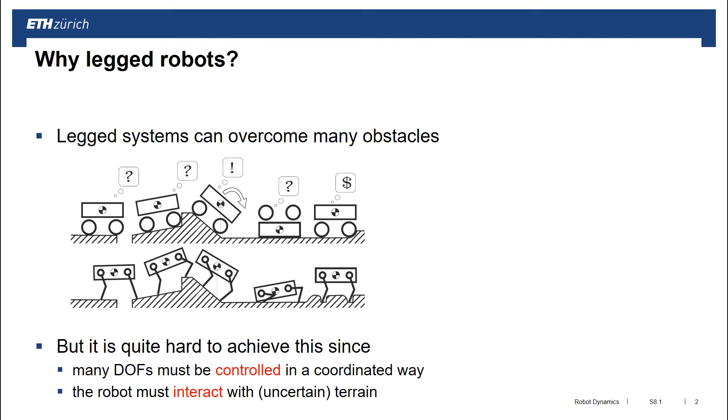The nice thing is that these mechanisms developed at the time, or the ideas behind them, were even included in some of the first machines that were really walking and had an engine to propel them forward.

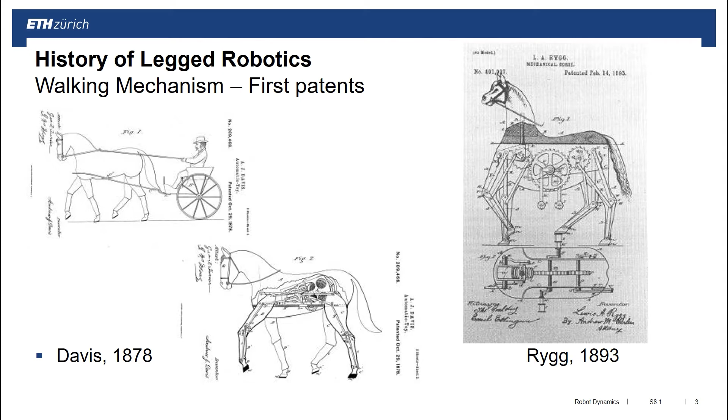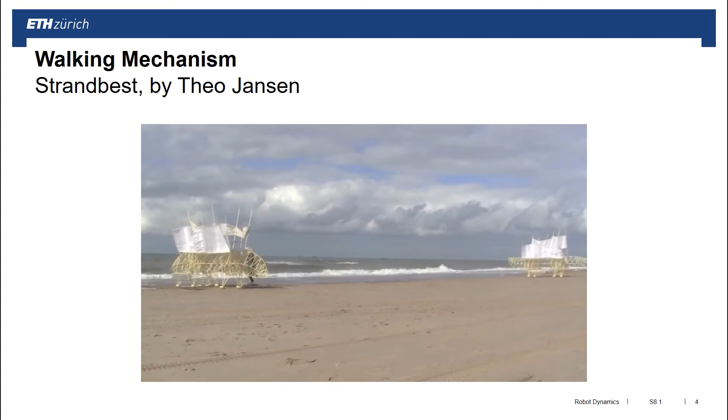These mechanisms still find application today. What you see here are the Strandbeest developed by Theo Jansen, a Dutch artist and sculptor. This is a mechanism that walks as if it had legs, propelled simply by the wind.

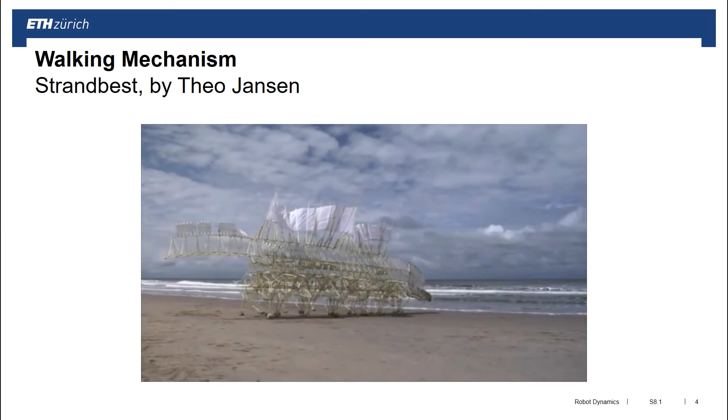These mechanisms are connected purely mechanically throughout the huge machine, and when you move them, these crank mechanisms create motions like the leg motions of a human or an animal, making the system move like that.

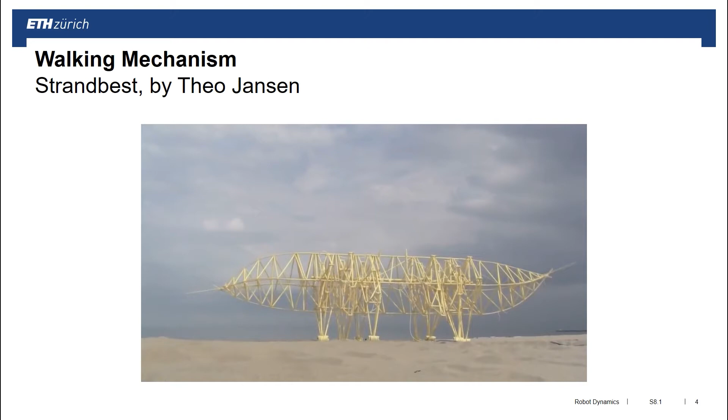This is purely passive. Really the only energy added to the system is coming from the wind. That also shows you a little bit how efficient machines can become.

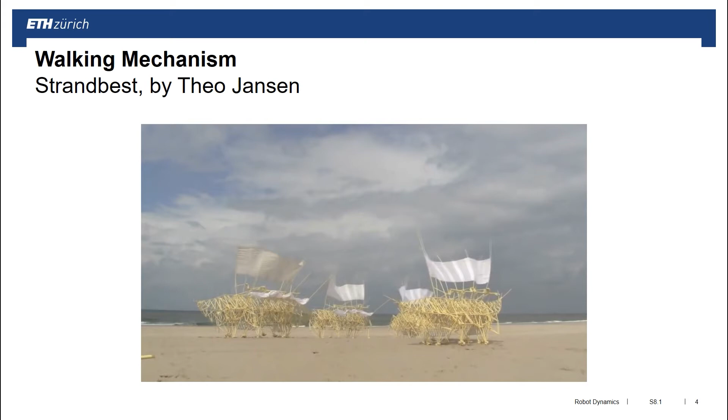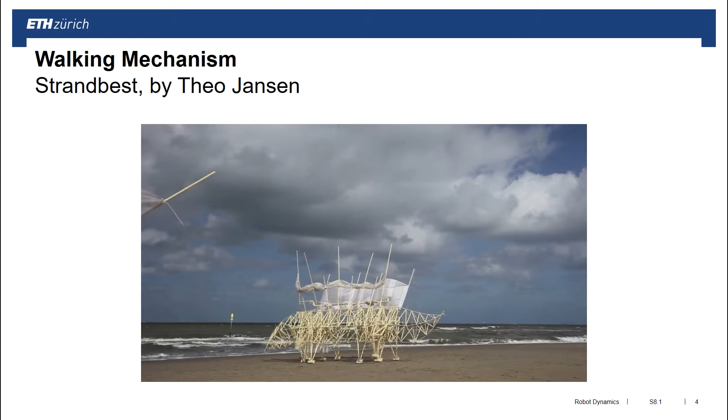Walking from A to B on flat ground is in essence zero energy work. All you have to do is compensate for the impact losses and friction losses in the mechanism. But as you can see here, this can be done pretty efficiently.

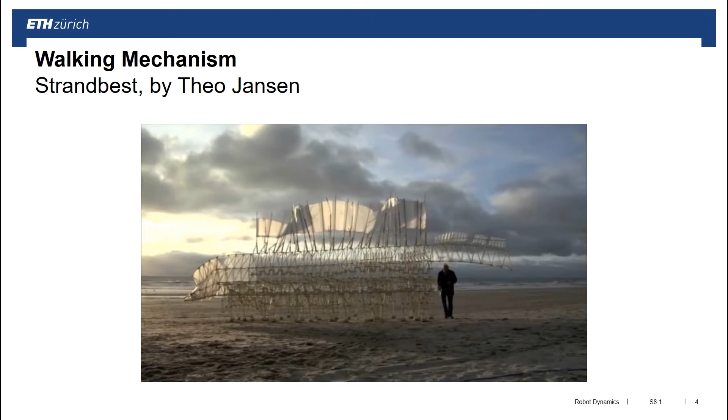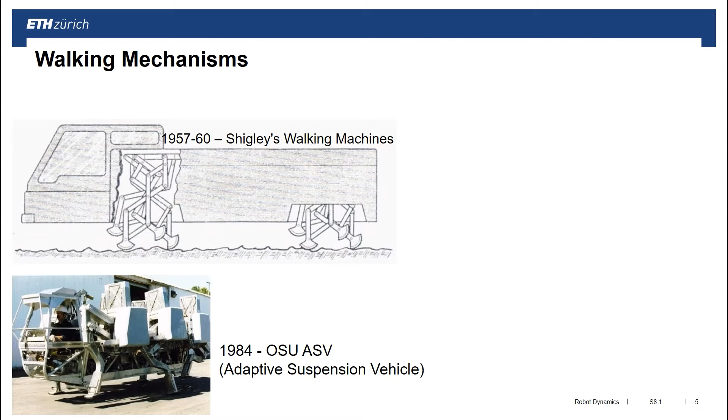These legs were, to a large extent, moving due to coupled mechanisms. At the time they didn't have computers able to calculate all these motion trajectories, but instead they mechanically realized that. Instead of me telling you more, here is a small video by the guy who developed this adaptive suspension vehicle, explaining a bit what they were doing.

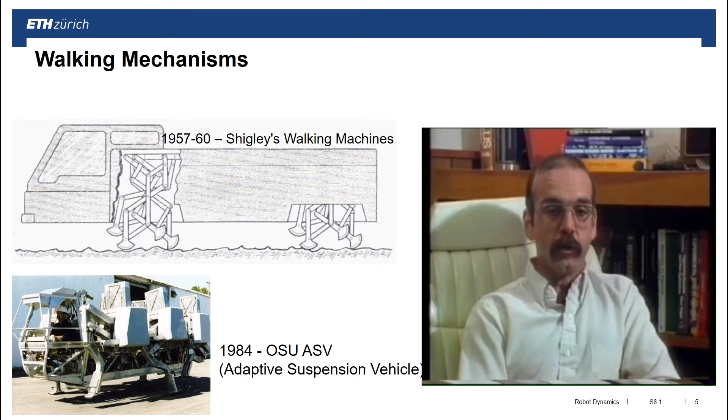The military has been interested in legged locomotion for quite some time, at least 20 years actively that I know of. The reason is that 50% of the dry land mass of the world is impassable to wheeled or tracked vehicles of any military design.

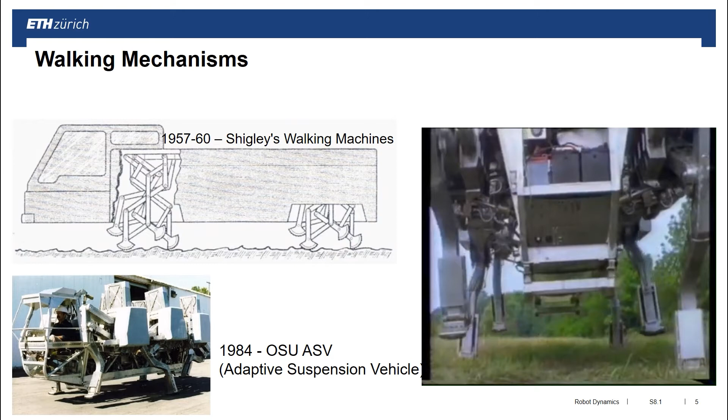Enter the Adaptive Suspension Vehicle, a six-legged juggernaut developed at Ohio State University for the United States Department of Defense. Ultimately, production versions of this prototype will carry men and equipment through dense forest, marshes, and boulder-strewn hillsides where even tanks cannot go.

As we'll see, the work going on around the world is producing a new generation of walking robots that embody many principles of biology-based engineering.

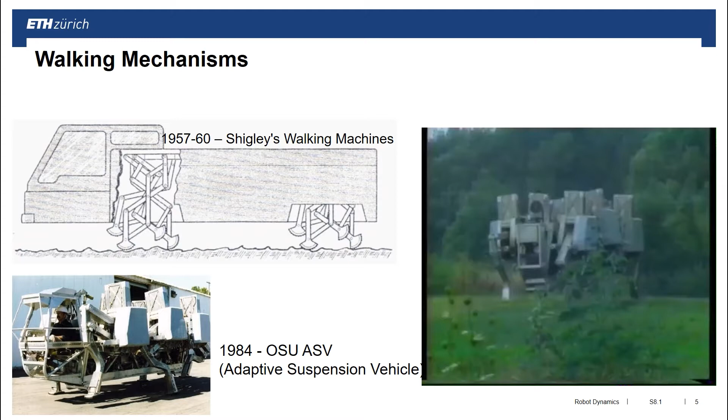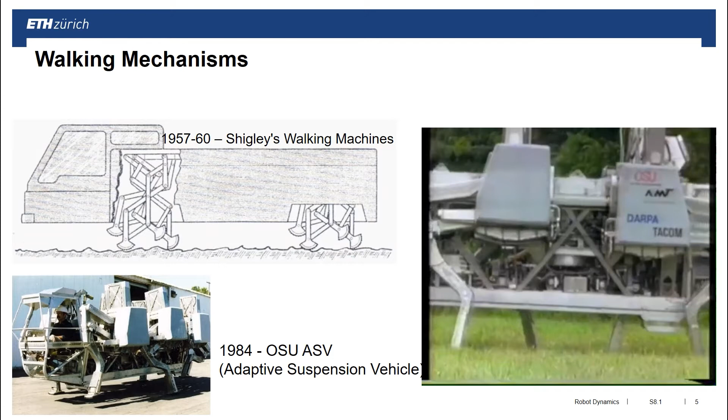A machine with 6 legs, like the adaptive suspension vehicle, can move faster. It has 2 tripods, meaning half the legs can move forward with each stride. It actually moves its legs like an insect in a pattern called the alternating tripod. At any one time, the insect is in contact with the ground through 2 legs on one side and 1 on the other, while moving the other 3 legs forward.

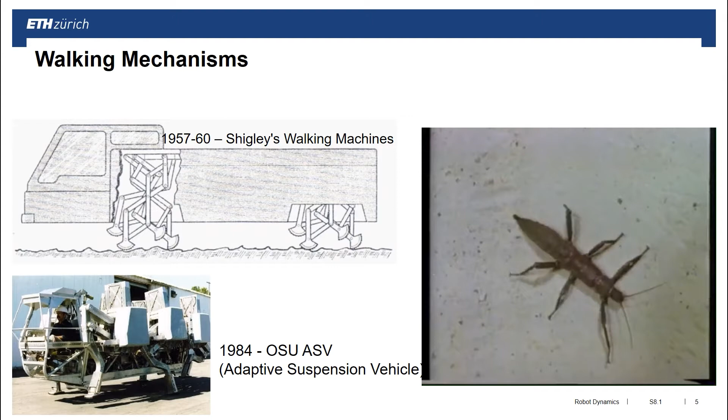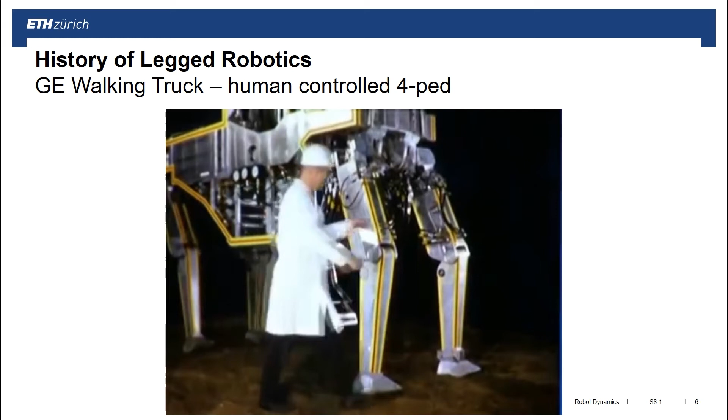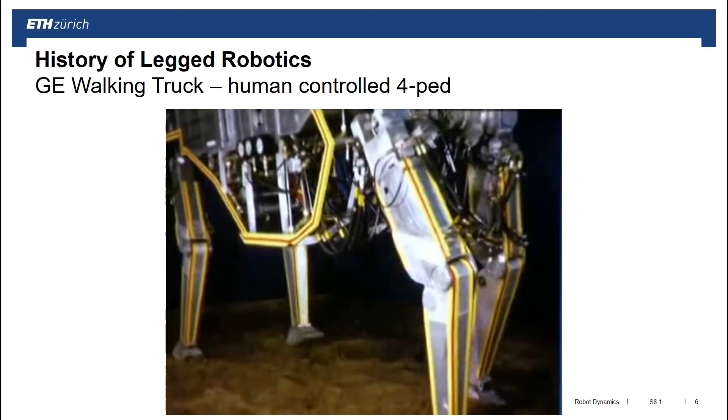A different direction are the developments by GE, which also happened around the 60s. In this example, you see the GE walking truck. This is a vehicle that has no mechanical coupling in the legs to make the leg move along a predefined swing leg trajectory. Instead, they have hydraulic pistons in multiple degrees of freedom of the leg, and then they have an operator sitting in the machine who coordinates the action of the individual joints, opening and closing every single valve of this machine in order to make the system move around.

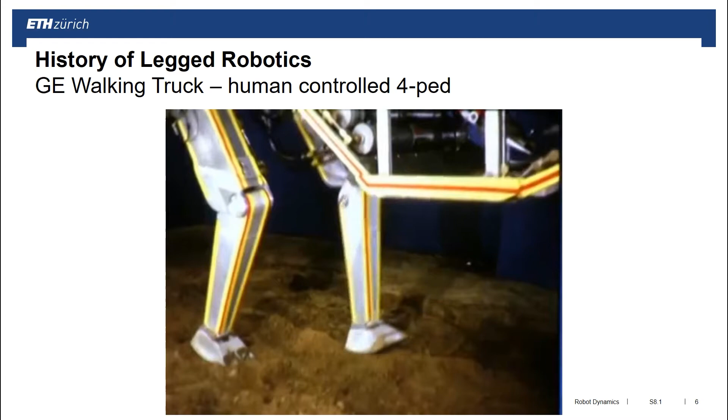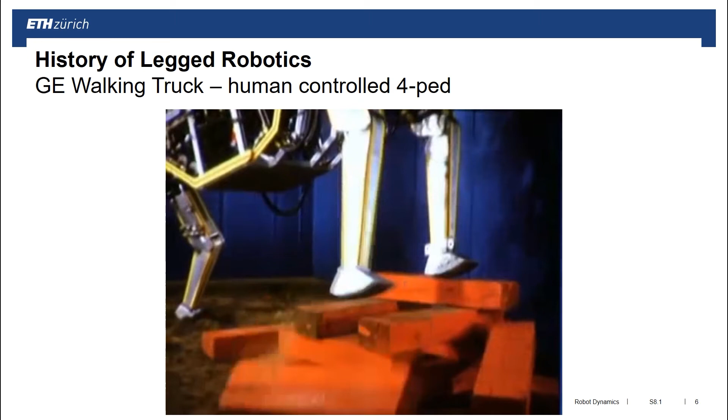You can see here in this video that it doesn't look very stable, and in fact it also looks physically not very correct. And that's in fact true. So the machine was hung up from the ceiling, otherwise it would just have fallen over. This coordination activity to move individual legs to stabilize the vehicle was so challenging for the human pilot that it couldn't be done without any controller or computer help. Back then, people didn't have servo hydraulics, so the work was very exhaustive to open and close these individual valves, and there are reports about this GE walking truck saying that the operators had to be exchanged every couple of minutes since they were so exhausted from their operations.

What I find very interesting is that this concept of having individual actuators in many degrees of freedom still finds application in some of today's construction machines, without any human help needed for autonomy but still human operated. An operator sits in these vehicles and has to open and close every single one of these valves. These are in total about 25 degrees of freedom that need to be coordinated to make the system move in challenging environments, so it's very similar to this GE walking truck from a controls perspective. The big difference is now we have servo hydraulics, so it's not that exhaustive anymore. Nonetheless, it requires huge coordination by the operator, and a lot of training to operate such machines. However, once you're able to operate it, you have machines that can go to the most challenging environments we operate in, but of course only human steered, not really in an autonomous fashion.

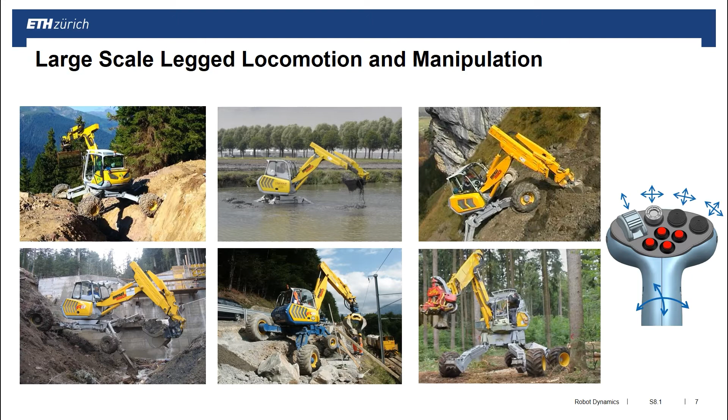If you're interested in more stories, go check out the homepage of the cyberneticzoo. There's a lot of fun facts and early machines that have been developed. Among others, you will find the Phony Pony, which was the first quadrupedal system that was computer controlled, so no humans had to coordinate individual legs. You'll find the Hardiman robot or exoskeleton, which was one of the first exoskeletons. You will see steam-actuated humans, mechanical elephants, and a lot more.

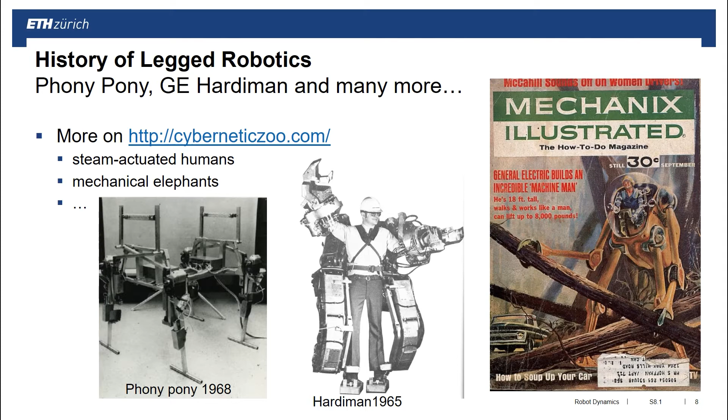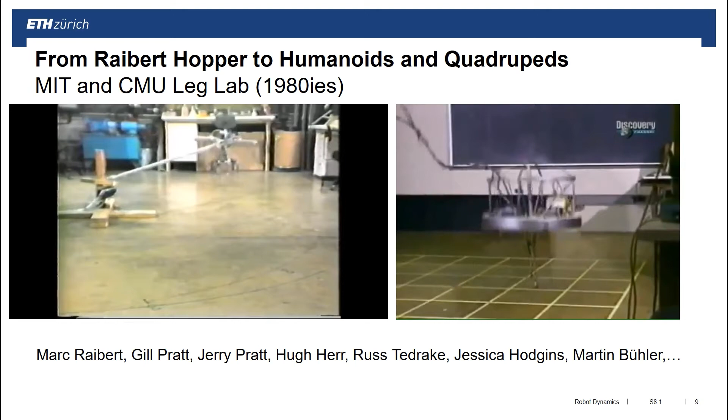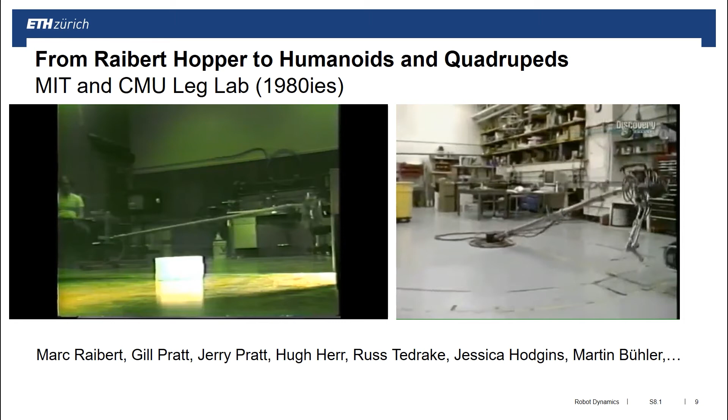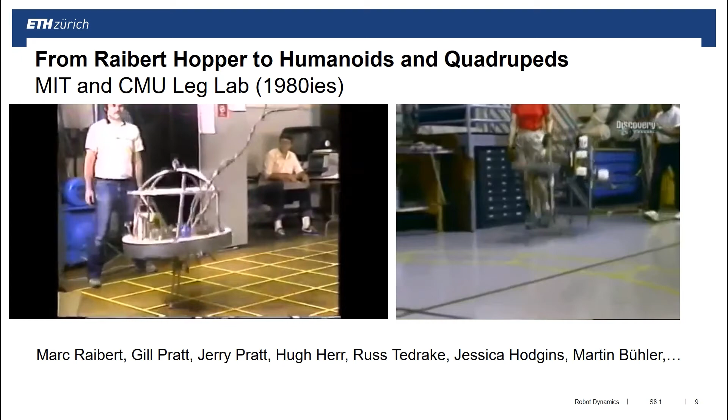The big breakthrough in modern legged robotic systems was done in the 80s by Marc Raibert at MIT and at CMU in the Leg Lab, where they developed the first dynamically balancing legged systems. You see here examples of some of the hoppers, like single-legged hoppers that were stabilized through a computer that figured out where to step and when to step in order to maintain balance. They were not only building single-legged systems, but also multi-legged systems, bipedal systems, quadrupedal systems, and the control algorithms that were propelling and stabilizing these different legged systems were all more or less the same. Already back then in the 80s, these machines did crazy dynamic maneuvers and were actually extremely advanced.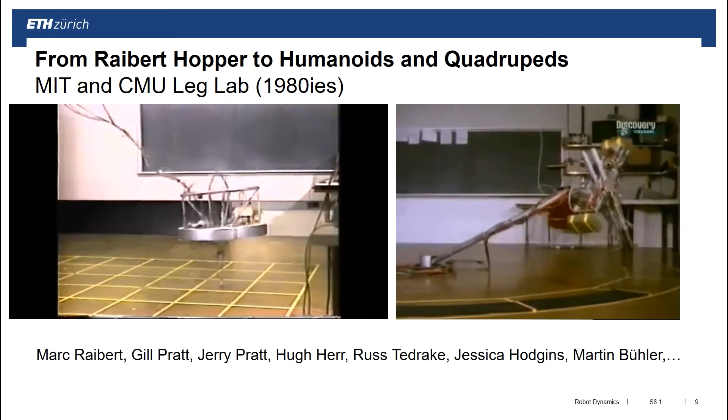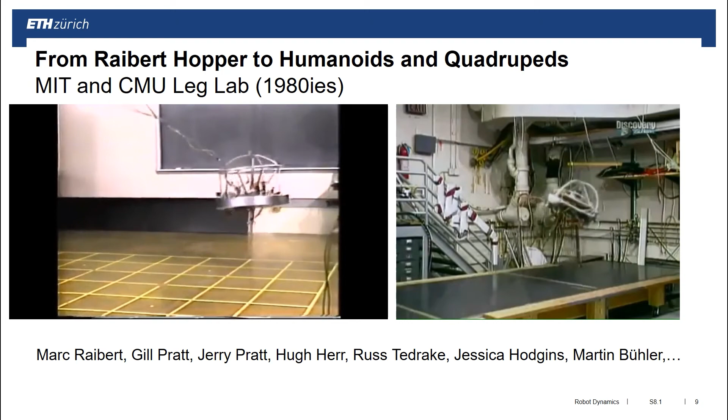The work and research done back then, and the people that contributed to it, is also the origin of a lot of the famous laboratories and companies that are out there today. I put here just a couple of names of people that contributed to these works.

In the 2000s, we then had a lot of activities in legged systems in Japan with the humanoid robotic systems that came up. Here is Honda Asimo, also world famous, probably one of the most advanced humanoids back then.

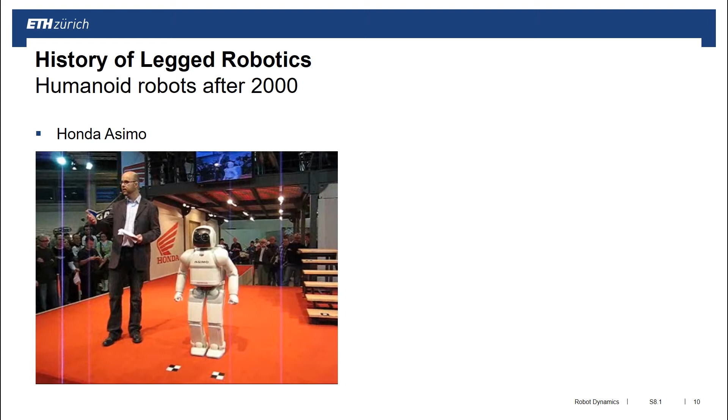There were a series of humanoid robots developed by Honda. There was not really an application in mind with these machines, but it was more to show what technology can do, how advanced these companies are. And if there is a Honda robot, of course there must be also their competitors' robots. Toyota also developed humanoid robots.

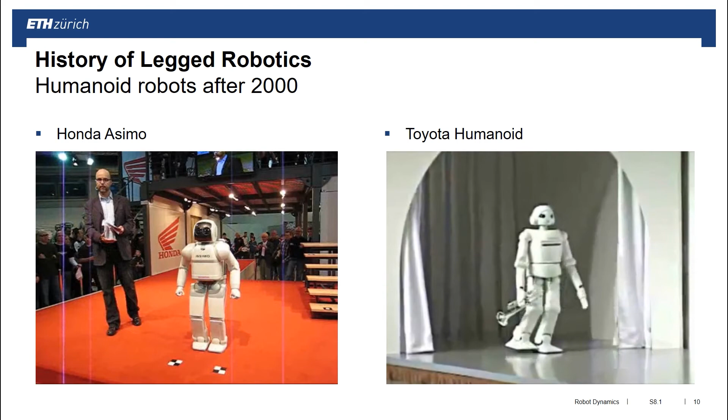These machines typically had many degrees of freedom. We're talking here in the range of like 80 degrees of freedom, versatile fingers, trying to replicate a lot of the morphology that we see in humans.

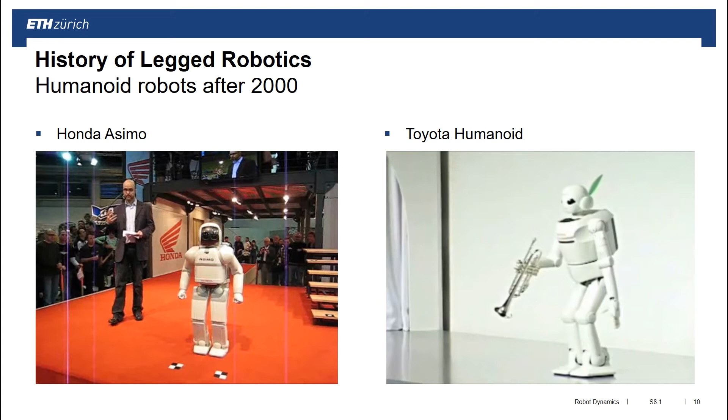They were mostly used for shows, for stage activities. You see here on the left hand side the robot walking up a stair, all of that very carefully pre-planned, kinematic planning, kinematic execution. You need to position this robot pretty precisely in front of the stairs, and it cannot really deal very well with uncertainties. On the right hand side you see a robot playing a trumpet, also a coordinative activity of the fingers, of the motion of the system, and so on and so forth.

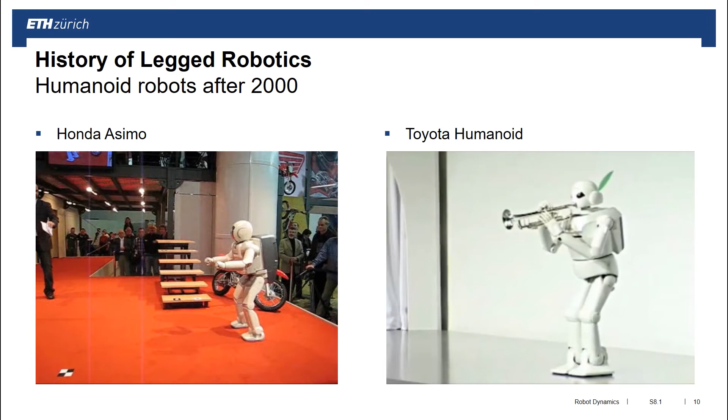In 2011, there was the Fukushima disaster after the earthquake. The tsunami hit very hard and destroyed some of the reactor buildings close to the seaside. We had a huge contamination of a large area.

And Japan, one of the leading countries in robotics, realized that they had a lot of robots, but actually almost no solution at all that could go into these reactor buildings or into this area and provide the necessary help. They could do stage shows, they could play the trumpet, they could do many fancy things, but as it looked like, critical people said they can't really do something useful.

In fact, the robots that were actually used here were at the beginning drones to observe the situation. Later on, there were a couple of tracked vehicles that were sent into these buildings. But even now, 10 years later, there is ongoing but still very slow development in robotic solutions that help in mitigating this disaster.

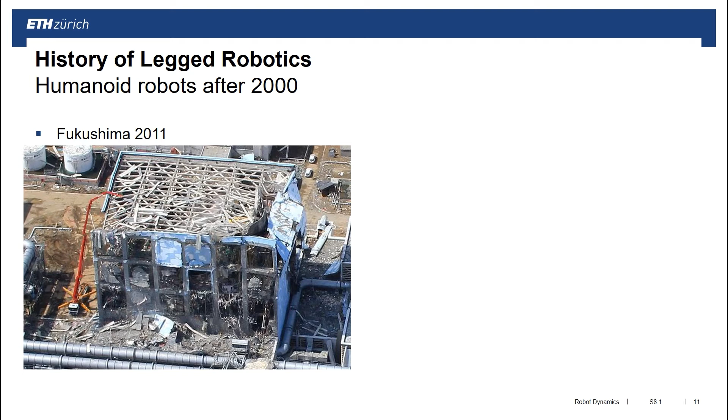Inspired by this problem, DARPA launched in 2012 the DARPA Robotics Challenge, which had the target to develop or streamline the research done in humanoid robotics towards systems that can possibly help in such a disaster scenario.

What they have to do is fulfill a couple of tasks related to what would have been done at Fukushima. They have to approach such a building, enter doors, get across obstacles, take tools, operate something with the tools, open and close valves, do stairs, but all in a relatively constrained environment. Of course, never as challenging as what you would face in a real world disaster scenario, but still showcasing some of the capability.

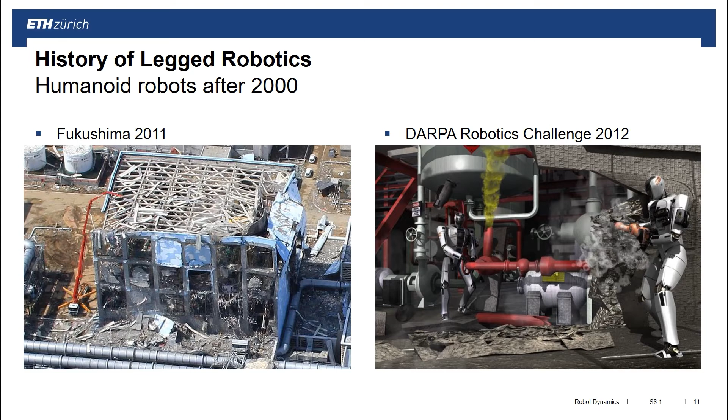Now, where did this go? I have here a small video by the DARPA program manager back then who explains what the challenges are and why we are not better than what we are.

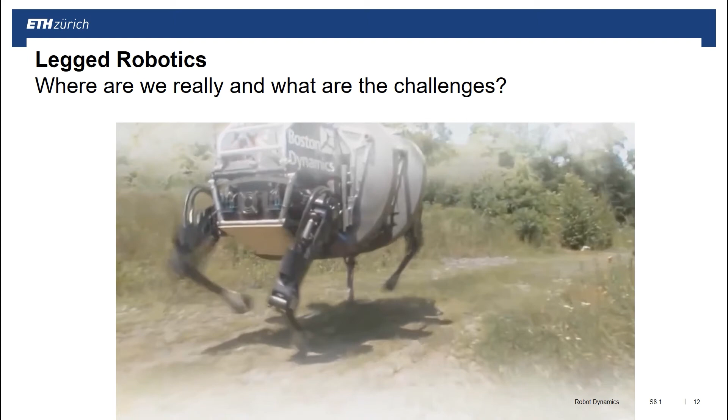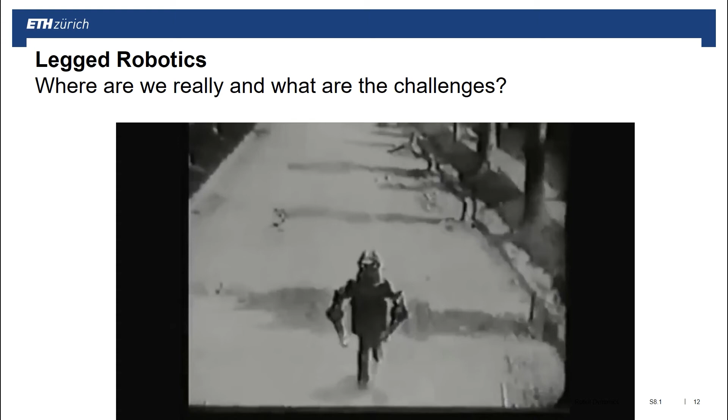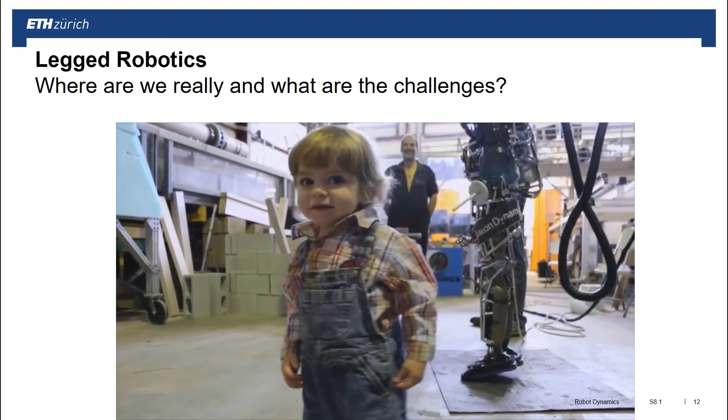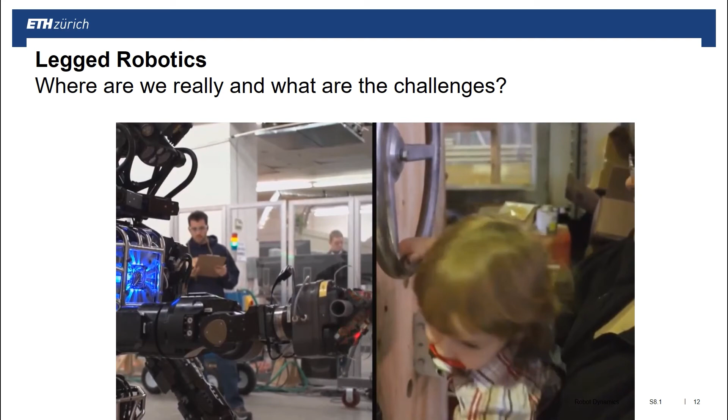The reality of robots today is very different than what we see in science fiction and in the movies in particular. The problem is that robots are really, really stupid, okay? They have very small brains, only a small fraction of 1% of the size of our brains. That's how you really need to think about them. So you have this mechanism, this machine that looks perhaps like a person, that seems to be able to move perhaps like a person, but the truth is it has hardly any brains at all. The head is empty. With a human one-year-old, you have this dichotomy. You have a very large brain inside of a one-year-old that sort of doesn't know very much yet. And so what you see is tremendous memory, tremendous understanding of social cues, of language, things like that. Even though a one-year-old can't speak, they can usually understand what we say. In that way, our robots don't come anywhere close to the intelligence of a one-year-old. Where our robots are similar to a one-year-old is in their competence at locomotion and manipulation.

When a one-year-old tries to walk up and down ramps or steps, they often fall. It turns out our robots have about the same level of competence right now, going up and down steps and ramps of roughly that same size. They fall roughly just as often.

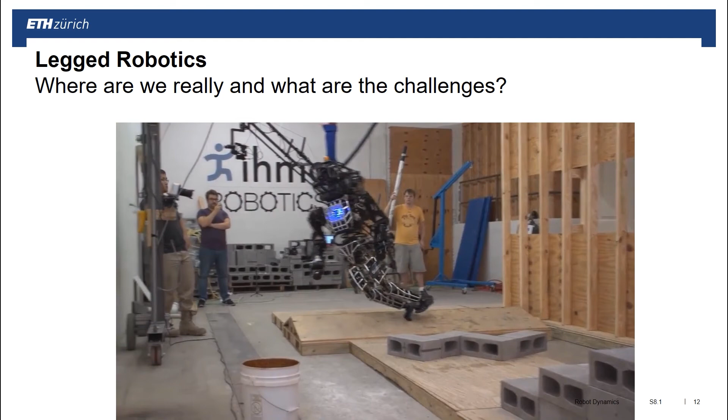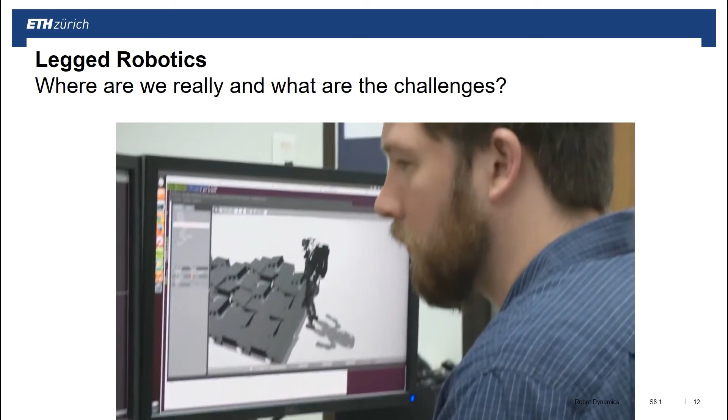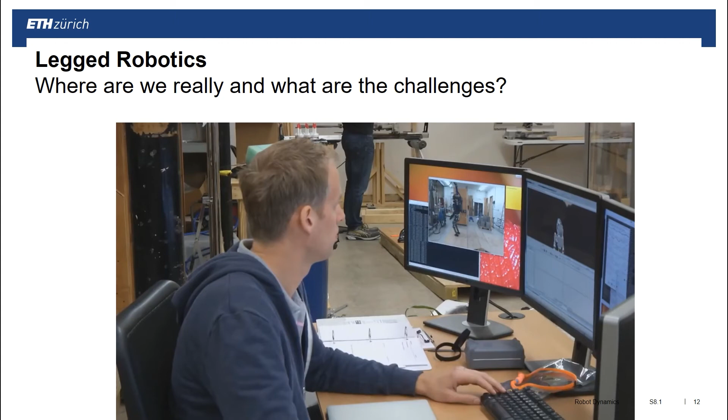The first challenge all the teams face is reliability. They've only had 6 to 9 months to build their robots and write software for them. For teams bringing their own hardware, that's the number one issue. For teams using Boston Dynamics hardware, they have to deal with software reliability, which is no easy task either. The hardest part is making sure all the bugs, hardware and software, won't end up losing them points in the challenge.

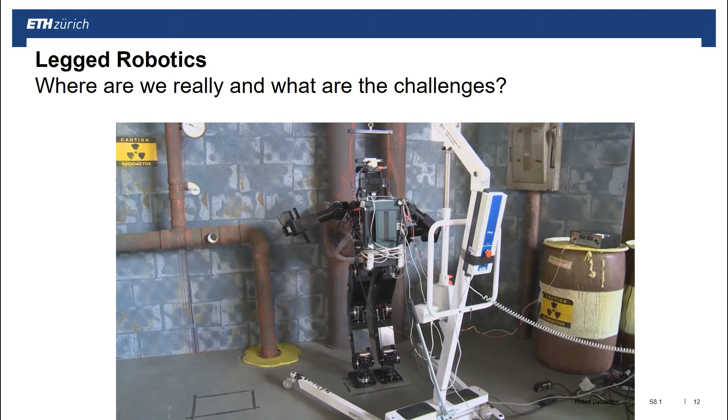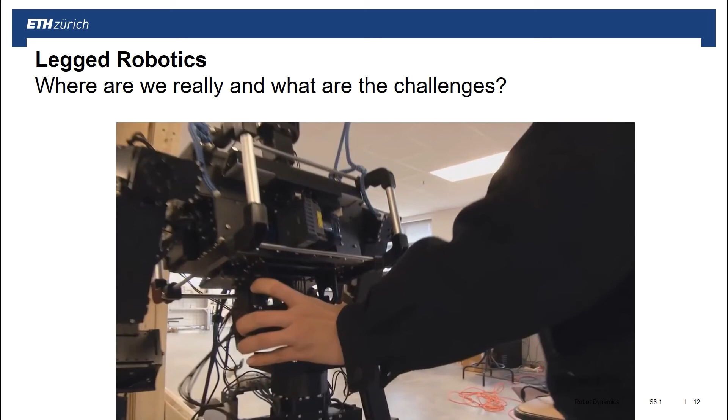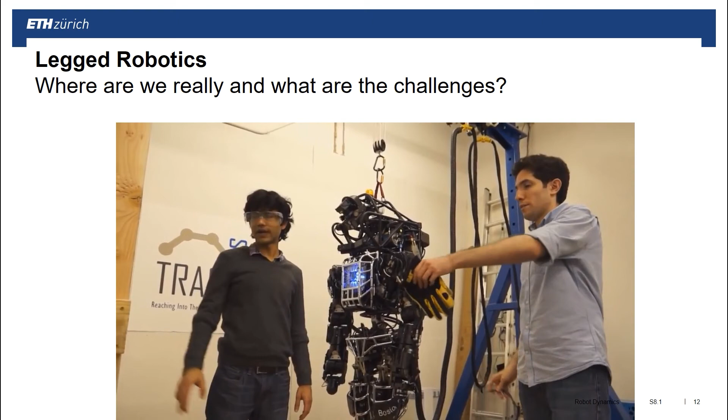Even a year from now, robots will not be able to leap mountains in a single bound. They'll still move around relatively slowly, still fall on occasion, and still need human supervision. Their brains will be roughly comparable to, I don't know, somewhere between an ant and a mouse — still really dumb compared to human beings. They'll still need humans to tell them which tasks to do; they won't be able to figure it out themselves.

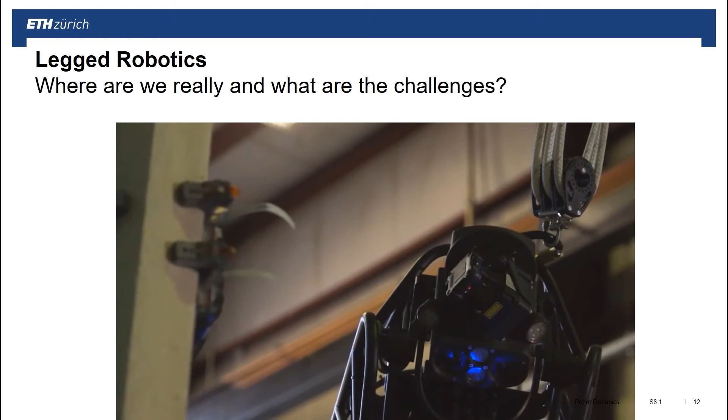But for disaster response, where humans have to work at a distance from the robots to stay out of harm's way, we think that pairing, that collaborative working relationship, can be quite effective. A year from now, we want a demonstration showing some utility for disaster scenarios.

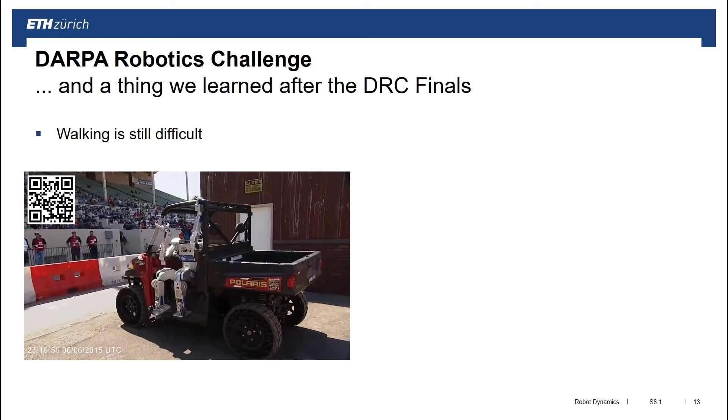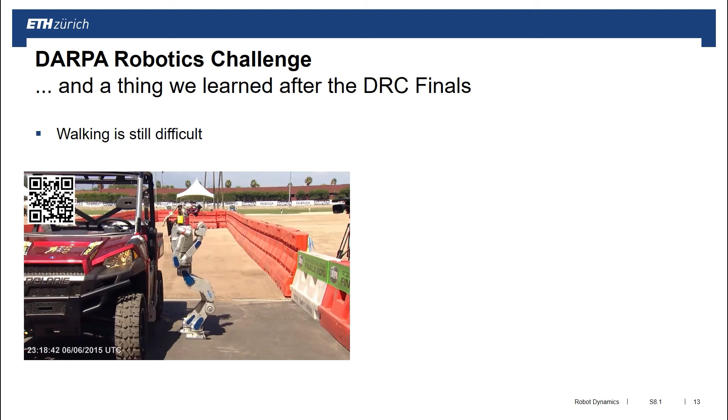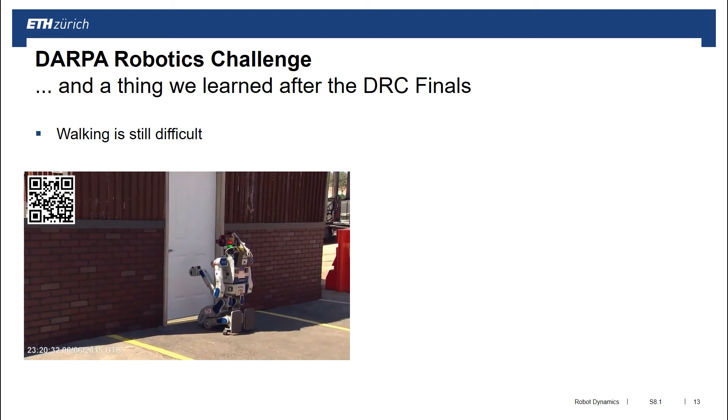The competition was a great success. You see here the final winner, the DRC-HUBO team from Korea. This video shows what they had to do: first drive a car to the entrance, then go into a building, open a door, operate a couple of tools in there, get across obstacles, and so on.

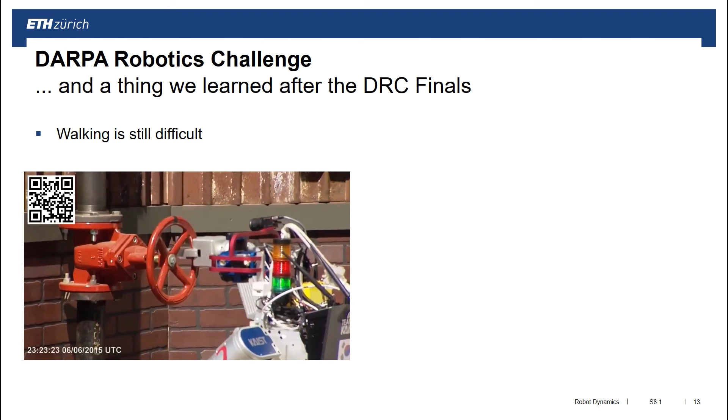But this video also shows you the challenge of it. First, it's sped up massively, so everything is actually extremely slow. Second, it was still very complex to walk, because the robot went down on its knee, which had wheels on it, and drove most of the distance.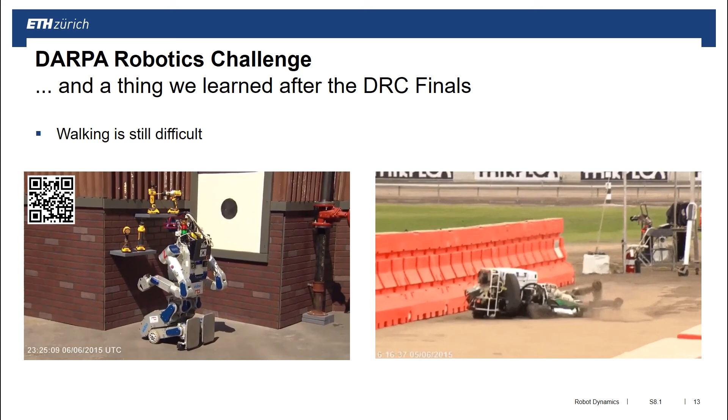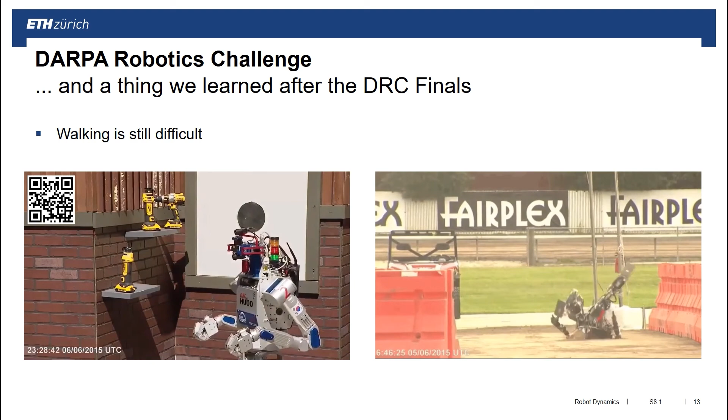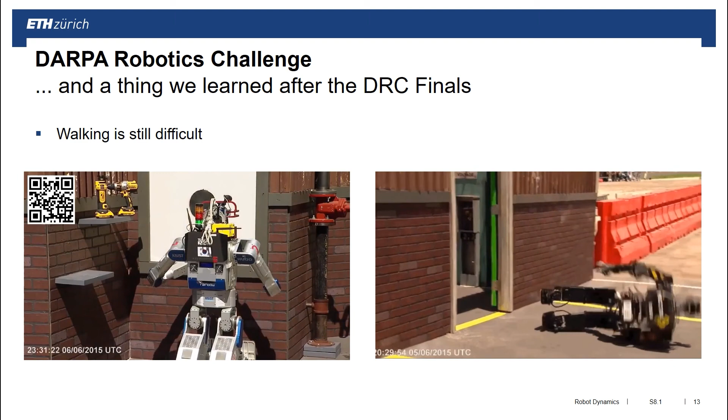If you look at the most-viewed video on YouTube about the DARPA Robotics Challenge, you'll see a lot of failures — robots collapsing while stepping across relatively simple terrain, while driving through sand, while interacting with a door. Most of these failures were due to the robots making contact with the environment when they didn't want to, or not making contact when they thought they had, then applying force and falling over. This is not to say the research these people did wasn't excellent, but it shows the complexity of the problems we're dealing with.

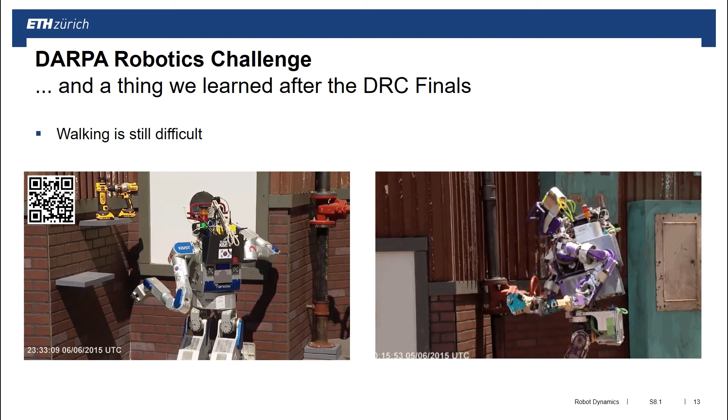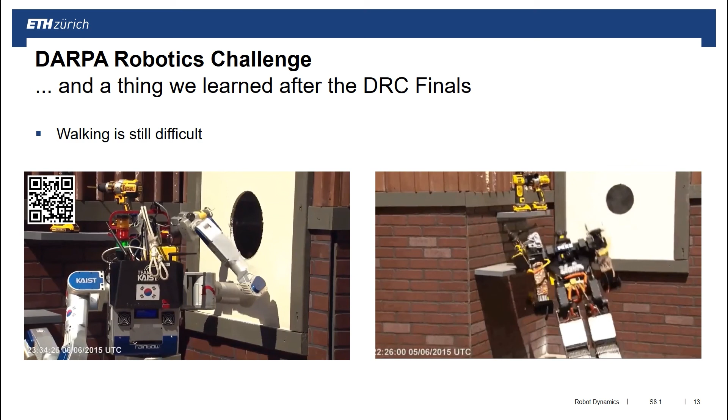I think these are still unsolved problems today. A lot of research still needs to be done to make these machines able to operate in such environments and fulfill such challenging tasks.

Since then, a lot of research has happened. I don't have time to give an in-depth analysis of the current state of the art — there's been a lot of work in humanoid robotics, multi-legged systems like quadrupedal robots, and walking and driving systems. Instead, I hope I've motivated many of you to take on research projects in this field, select the corresponding labs here at ETH, and follow conferences and workshops, many of which are now online all around the world. I think you'll find a lot of excitement around these types of vehicles.

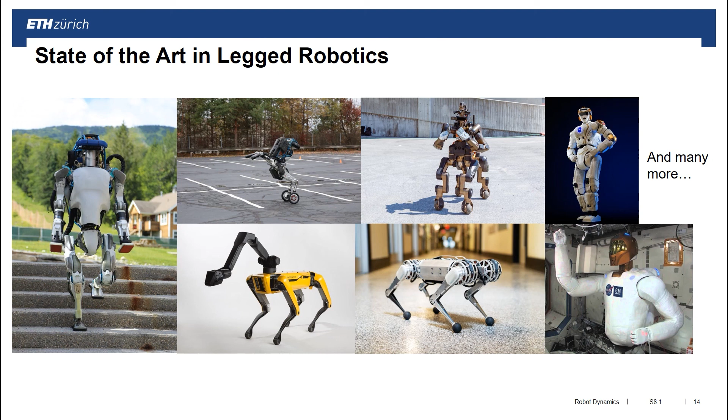With this, we're closing this small video segment and diving into more specific actuation and control technologies required to make these systems move.